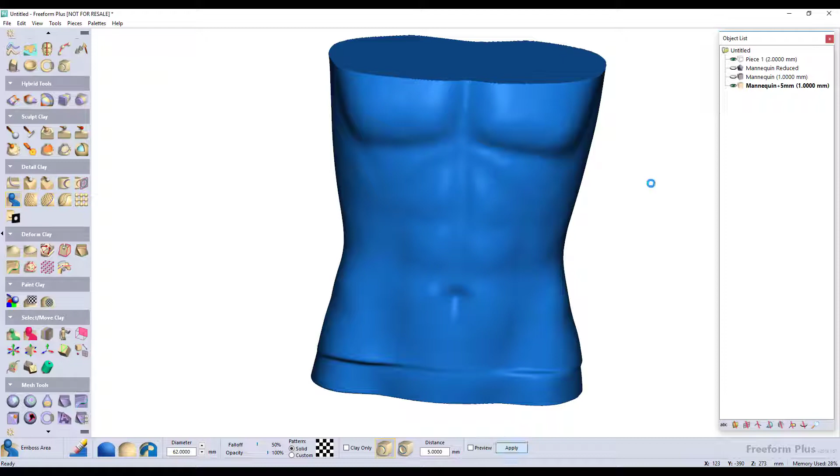I'm smoothing out some areas. Now I'm going to duplicate it, offset it by 5 millimeters, and cut off the top just so we can see what we're talking about.

Then I'm going to defeature the abdominal muscles because I don't want that in my brace, and maybe the belly button too, get rid of those. Then I'm going to add some clay where I think I can defeature it a little bit more, and smooth that out.

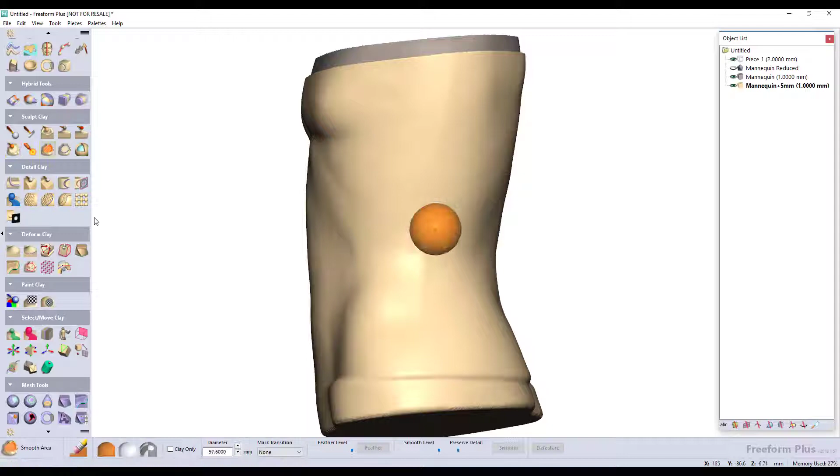I'll smooth out the edges a little bit. Once I have this all smoothed out, I'm going to take a look at the parting lines here on the side and defeature that. I'm still not happy with the ab muscles, so I'll use the hot wax tool to add more clay in some areas and build it up a little bit. Then I'll defeature this side as well.

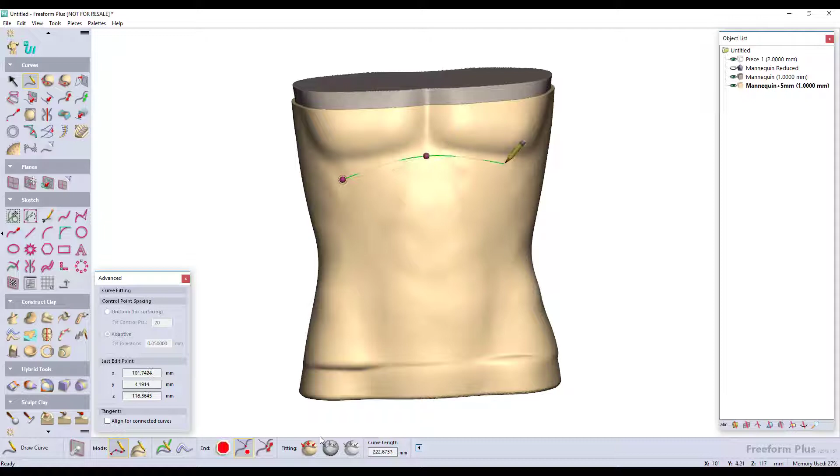Next I'm going to add a spline on top to create my top profile of the brace, and then I'll just adjust these a little bit. And then finally I'll add a ridge to that so I can make a custom cutting tool.

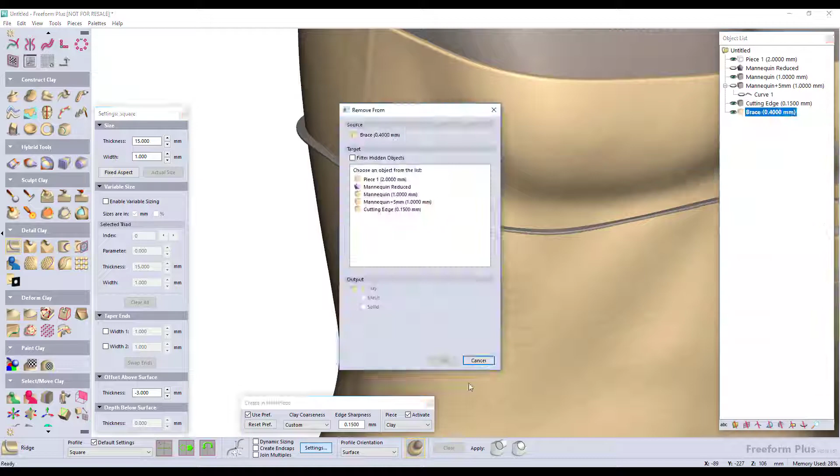This will allow me to separate the top from the bottom, which I don't need, so I'll change the clay coarseness real quick, then use that as a cutting tool and cut that away. Once it's separated, I can highlight the top and delete it, and there's my top profile.

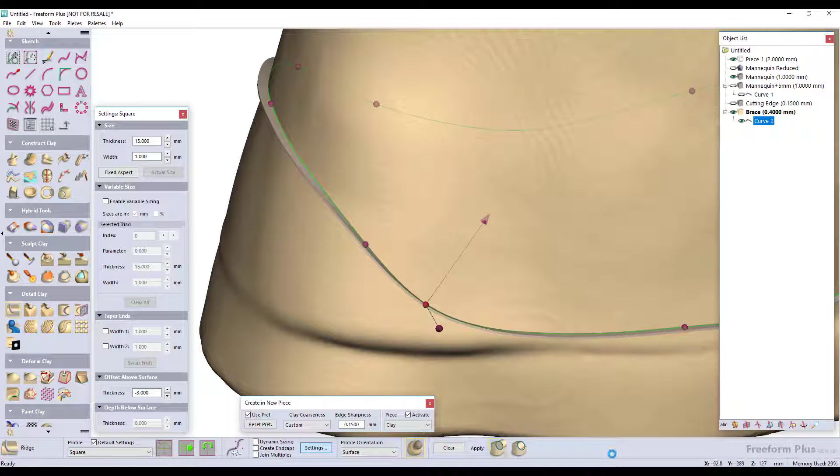Now here I'm doing the same thing to the bottom, just creating a bottom profile. I'm going to adjust it a little bit, then add in a ridge. Once I have that ridge, I can use it as a custom cutting tool, which will give me the bottom profile of my brace.

And I'll separate that, delete out the bottom, and now I have the start of my brace. I'm going to hit it with one more smooth, just a global smooth, which smooths all the areas at once. It's pretty nice. Then I'll start creating my side cuts here.

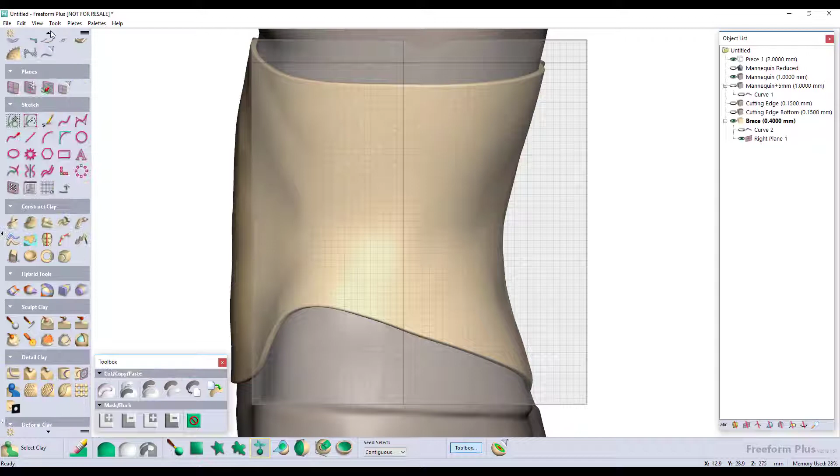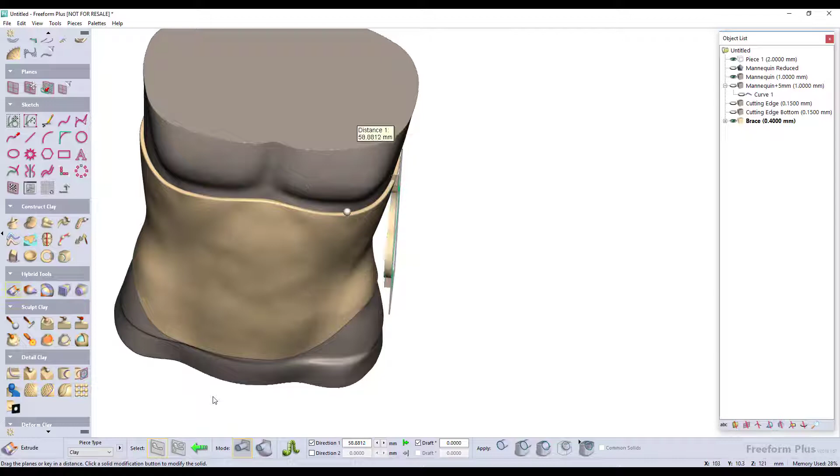So I'm using a plane and sketching, and I can define these sketches all I want. I'm just going to trim these away, and then offset them, and do some filleting on the sharp corners because I don't want any sharp corners. Then I'll close it up to make a sketch profile, which I can extrude and use as a cutting tool also. I'll do the same to the other side.

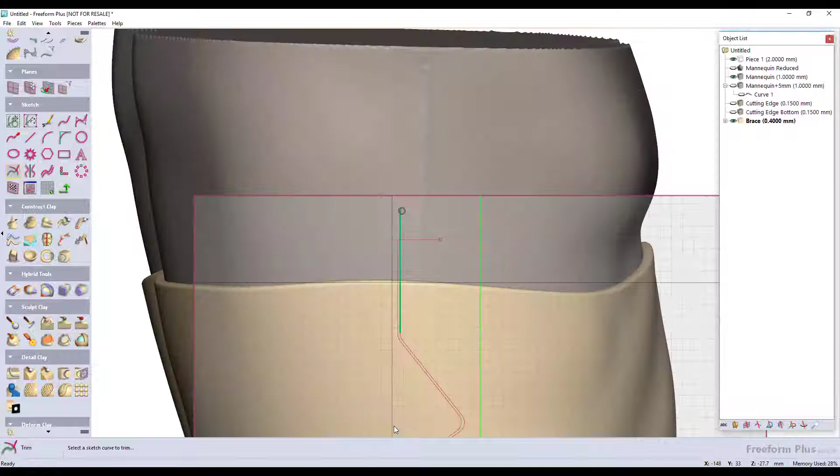Again, I'm going to create a plane, and then create a sketch profile on that plane, and I want it to be unique from the other side so there's no confusion. I'll add in the fillets, trim that up, and it turns blue. I can now use it as an extrusion, and I will extrude cut through the model. Nice.

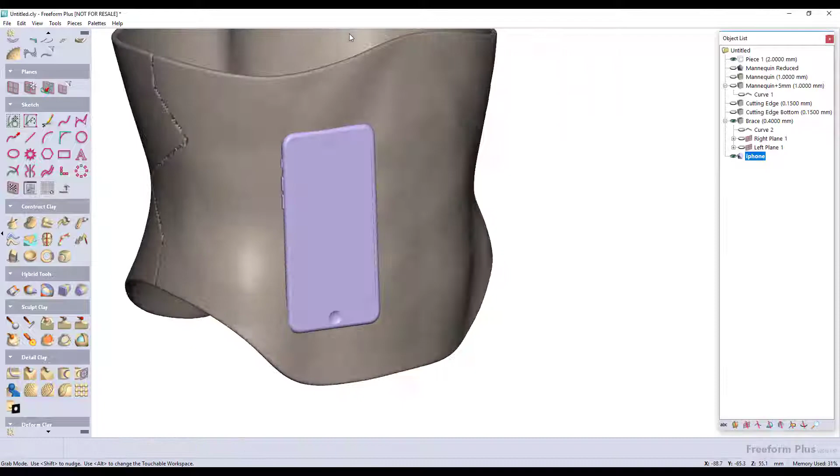Now I'm going to add in something that people wearing this might want - a cell phone case. So I'm going to put in a model of a cell phone, adjust that a little bit so it's in there appropriately so people can take their phones in and out. Then I'll convert this phone to clay.

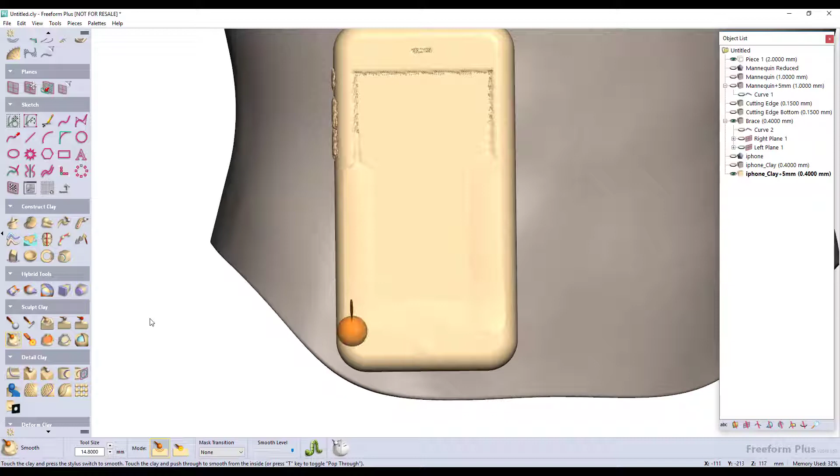Then I'll offset it by about 5 millimeters, and smooth these areas out. I'm just doing a rough smooth, kind of defeaturing some things, getting rid of things I don't want. Then I'll smooth it over again.

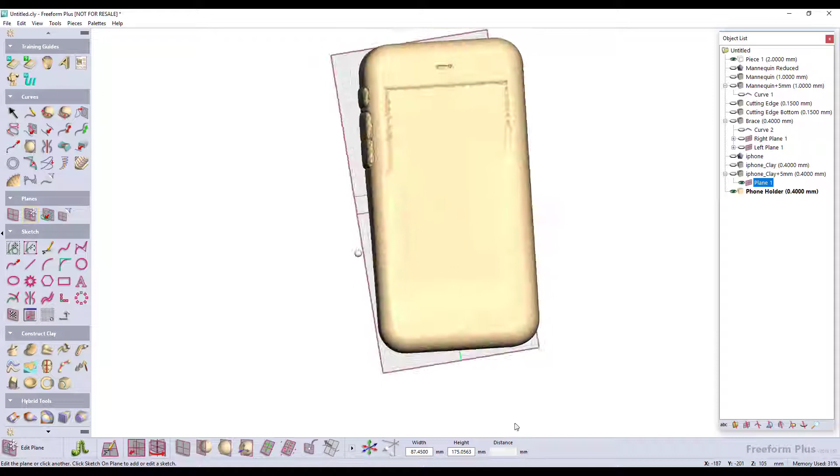Then I'll set the plane behind us and extrude to plane, which will make an extrusion all the way back to that plane. Then I will hollow it out. Once it's hollow, I'll put a couple more sketch profiles on the plane, just something quick and dirty - let's just do 2 squares. And then I can use those as a cut.

Now I just need to add that to the existing brace, and there's your cell phone holder.

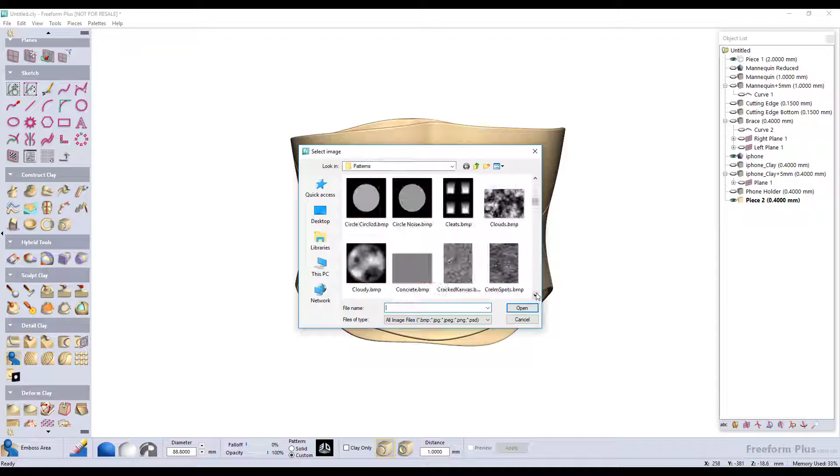I'm going to go ahead and add the world's greatest logo in, 1 millimeter out - that looks good. And then I'll just create some more design details on the back. I could have done a unique pattern all around this, but I didn't want to do that in this video.

And now that's done, so now I can go ahead and separate these as a front and back. I'll export this as an STL if I wanted to, or if I have a 3D Systems printer, I can go straight to 3D Sprint.

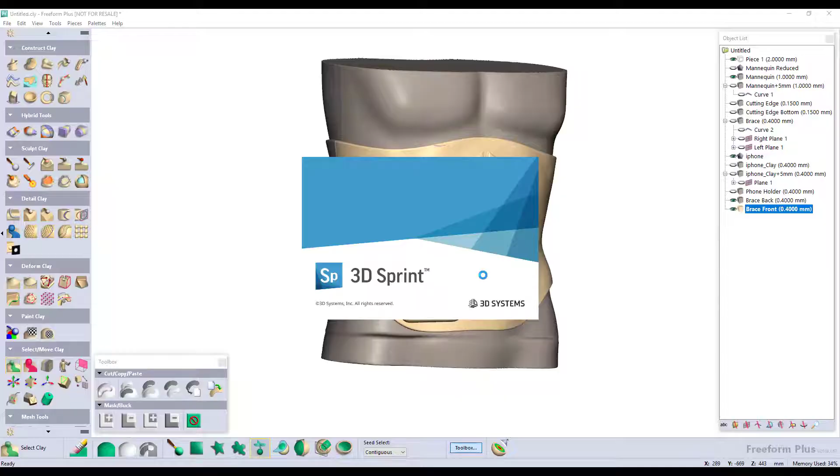This is our build preparation software, which allows us to fix any of the models, prepare them for print, and things like that. Works really well if you have a 3D Systems software or printer like the sPro 230. I'm going to highlight both of these and orient them in the correct orientation.

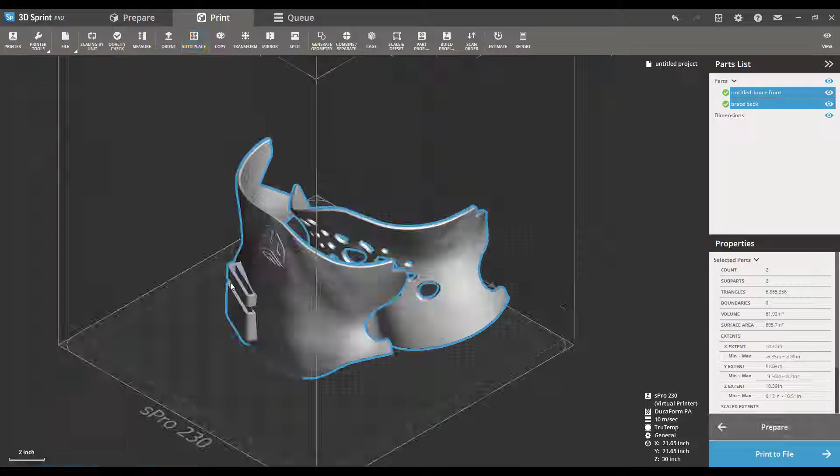I want to have very good surface quality. Then I also want to auto place it so it's right in the middle.

And that's how you make a brace. Thank you very much.